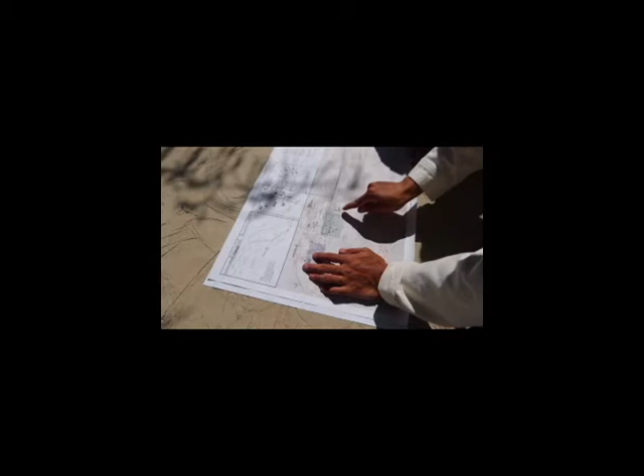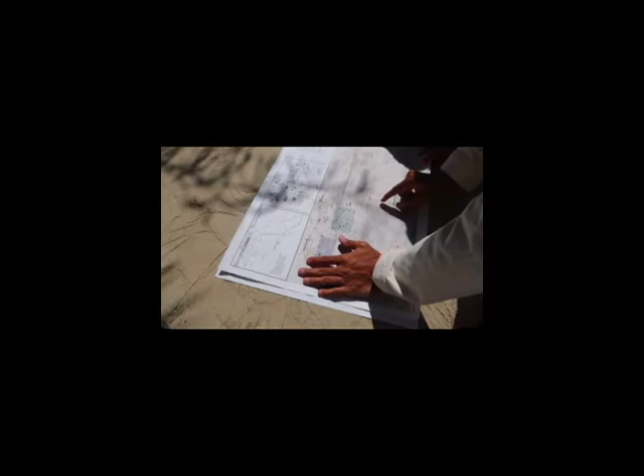The typical construction site can be quite complex, not only on the technical side but also because the various professional disciplines must work in unison as a team to achieve the required result for the success of a project. In most cases, the required result includes delivery of the agreed product within budget, with quality, within the agreed time frame. The three primary considerations are usually scope, cost, and time.

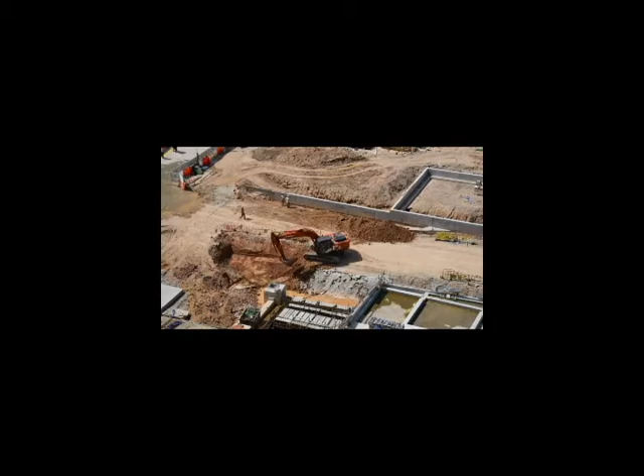Apart from these three considerations, safety on site is also one of the key requirements of modern construction.

In the modern construction framework, numerous site requirements are prescribed by legislation. Ensuring compliance with these requirements involves the ongoing monitoring of operations on site by a dedicated safety officer.

Over and above the safety officer, the typical construction team involves a number of professionals from different disciplines within the building sector. They are usually highly qualified individuals who specialize in their own field of expertise. So let's dive into it.

Professionals involved in a construction project are: town and regional planners, architects, engineers, quantity surveyors, land surveyors, construction managers, and last but not least, safety officers.

Now let's go a bit into definition of what I've mentioned above. First, town planners and regional planners. These are professionals who decide what can be built and how those areas will be used. They usually focus on the big picture of community needs and the impact on the surroundings. So they're mostly involved in the planning side of a project, as in how and where it should be located and how beneficial it can be to the surrounding areas.

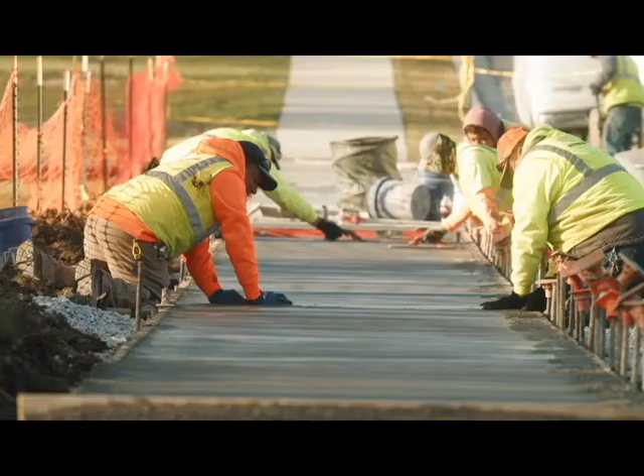Here we have the types of engineers who can be involved in a project. However, projects differ due to their structure and complexity, as in if it's a mega project or a medium project. Namely, there are civil engineers, electrical engineers, mechanical engineers, metallurgical engineers, and industrial engineers.

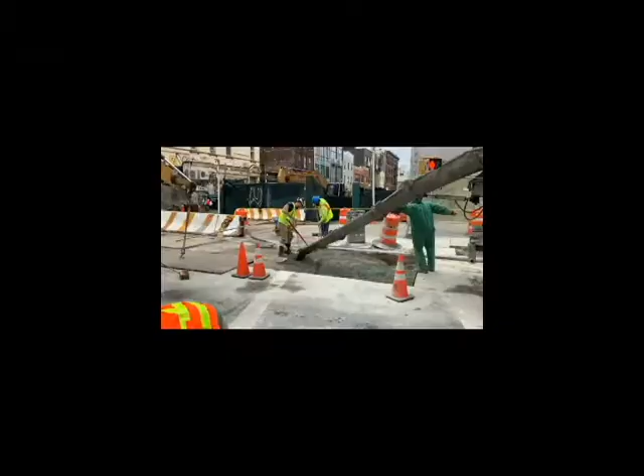Perhaps the most recognized branch of engineering is civil engineering. The reason being that it directly affects the infrastructure used by society. Civil engineers are commonly involved in all aspects of community infrastructure and housing construction. Our homes, roads, airports, and bridges are built thanks to the involvement of engineers.

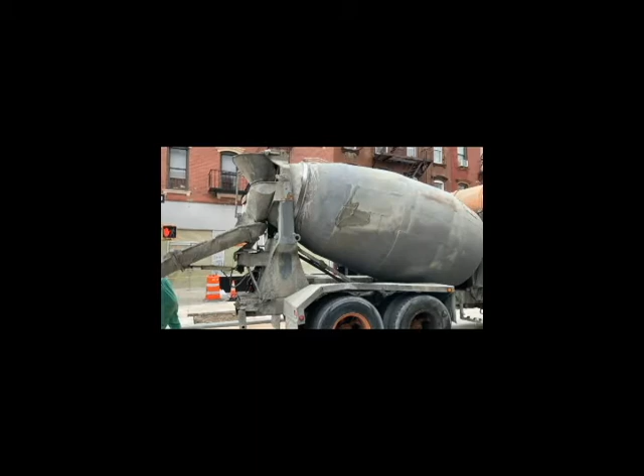Civil engineering includes the following different specialties within itself: environmental engineering, geotechnical engineering, hydraulic engineering, material engineering, structural engineering, and transportation engineering.

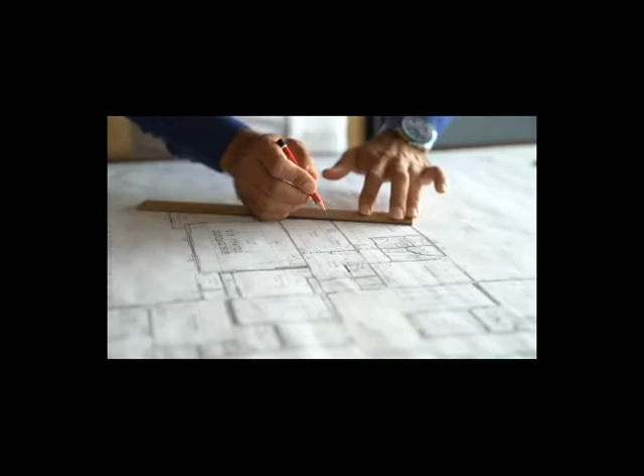Then we have land surveyors. These are professionals who prepare sites for construction by making precise measurements to determine property boundaries, and then they provide the relevant data for engineering, map making, and construction projects.

Then now we have construction managers. These are professionals that use specialized project management techniques to oversee the planning, design, and construction of a project from its initial phase until the closing phase. I know someone might be asking, what about construction project manager? How does it differ from construction management? So worry not, I'll create another video where I discuss in detail how project management differs from construction management.

Then last but not least, we have the safety officer, as described above, but for more detail: these are professionals who ensure compliance with the requirements or regulations of safety for workers and the environment. Both matter. The safety officer is also in charge of inspecting site conditions to determine if hazards are present, and to establish procedures and policies to overcome those hazards.

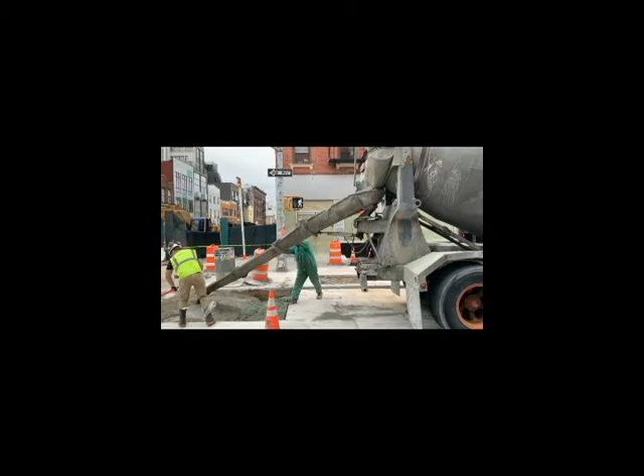In terms of safety on site, the environment and the workers are the key parts of it. So both us and the environment matter. So what happened is they called the nature guys, and they came and took that snake using their specialized equipment, picked it up, put it inside their bags, and left. I was like, oh wow, this is surprising. That thing is a beast, and it can destroy a person. But yeah, that's when that knowledge hit me: okay, in safety the environment matters, and also workers matter.

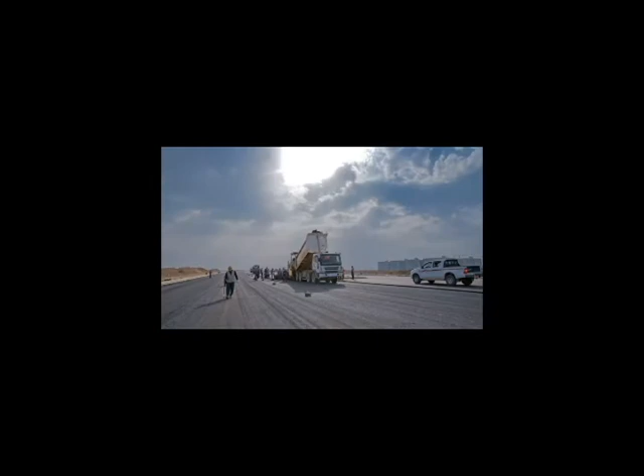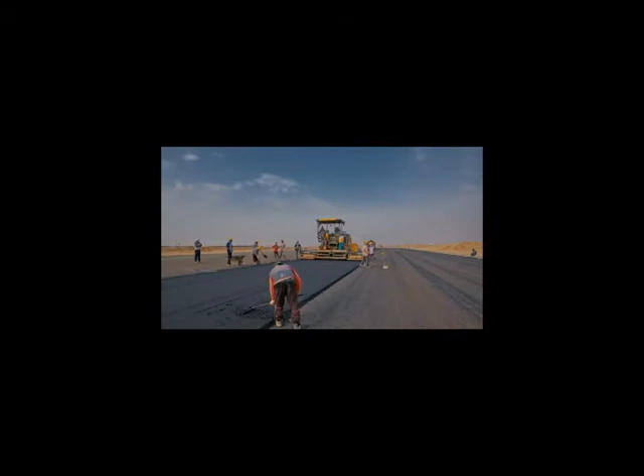So meaning what? Even the grass itself, how you cut it, how you strip it away from where you have to excavate, it matters a lot. That's why there are usual regulations. If you work on site, you see there are regulations and compliances whereby an environmentalist comes to your site and observes how you did things, in respect to the environment. Then after that, they produce a report on how you guys complied in terms of the environment - did you destroy more of the environment, or did you take care of it as you were doing your work?

So it was one of the amazing things. Like, this is quite an impressive thing, because if it was up to us, I can just imagine what could have happened at that moment. But yeah guys, issues regarding safety are very important on site, because if we don't comply with safety, the site can be closed and no one goes in or out, just because of tampering with the environment. So environmentalists, when they come there, they have to find everything in order.